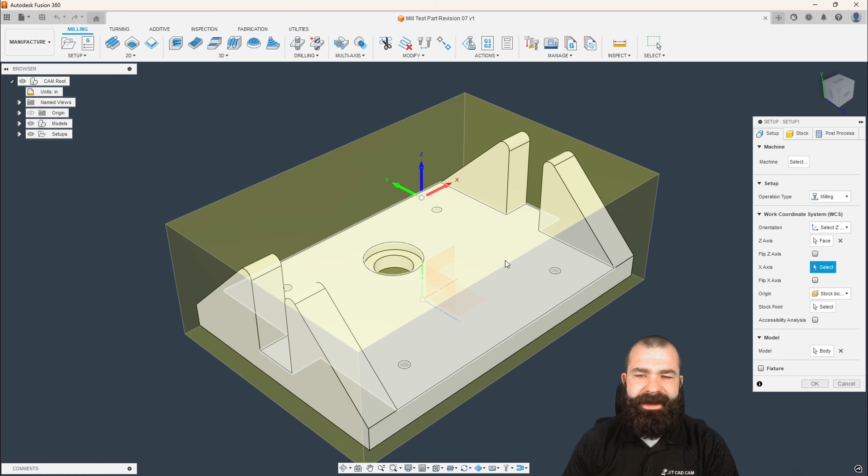Now, the call out for the stock size as a whole is, let's go ahead and see if that's on our drawing. I don't believe it is, but if I remember correctly per the website, it actually is a 3x1x2. Now, as you can see, my Fusion 360 actually automatically gave me that size. However, you can plug that information in here in real time. The trick, though, is always do your setup before your stock.

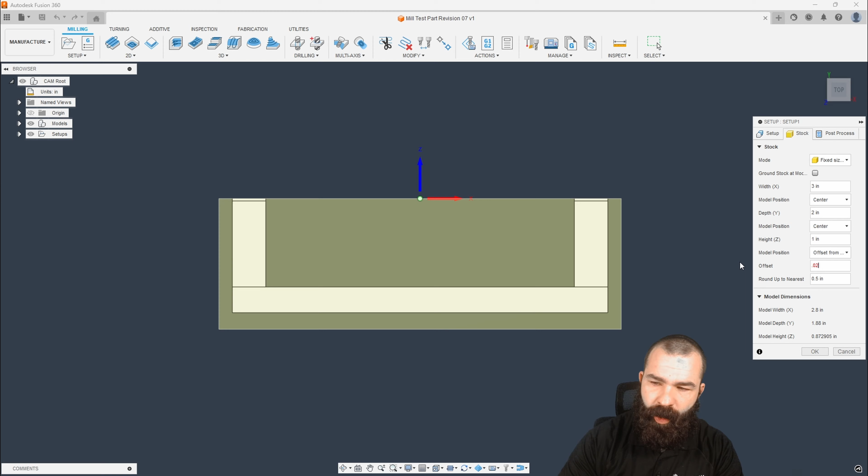And the reason for that is as soon as I pick my Z and set my X in this case, so I'm going to go ahead and create my X the long ways here. Now, if I go back to stock in this case, you're going to notice that the dimensions have automatically changed to accommodate keeping that rectangle around my part. Once you change these actual dimensions, though, it will kind of lock that in, which will throw you off. But again, as you can see, we have our 3, 2, 1.

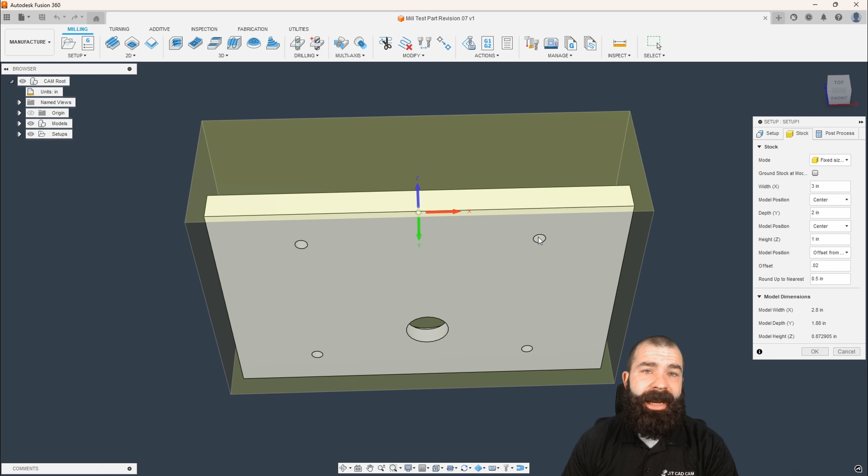The only thing I'm going to adjust is my offset from top. And I'm going to go ahead and just move this up to 20. And as you can see, with that sitting at 20, we now have that ability to face off the top or clean up any material.

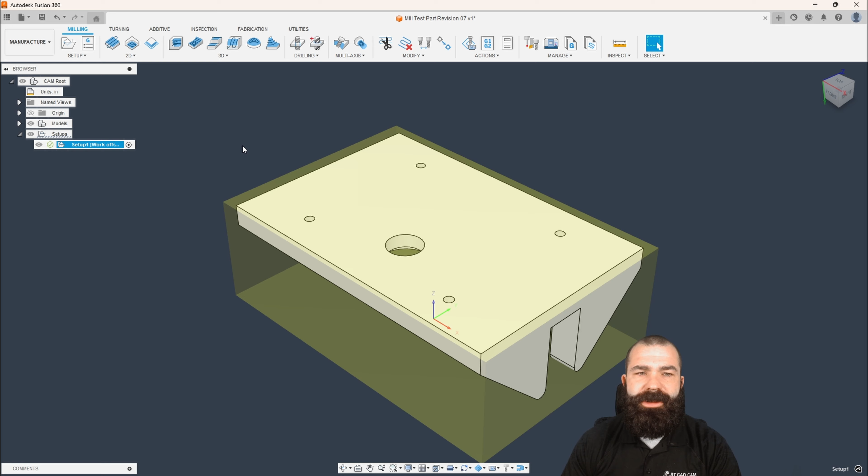However, here is something that I think I might actually do on my part, which is do the backside first so I can hit all of my outside edges, face off the back of my part, maybe tap, if not actually spot drill these holes on the backside, and get that all cleared up for the flip on the next op. So let's go ahead and do that.

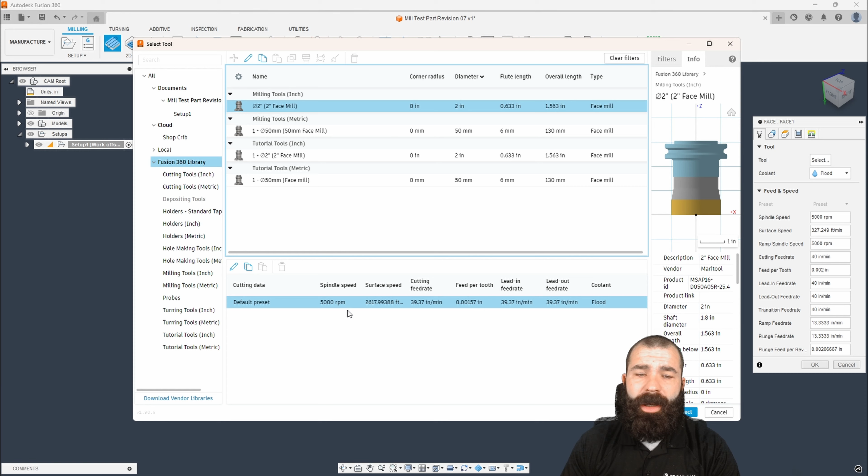So I'm actually going to go back here and flip my Z. Now you can see I actually have my rectangle faced up. Again, that base is very square for me, so it's going to make it very easy to hold it in an op 2 scenario. So let's go ahead and hit OK. What I'm going to do from here is I'm going to go ahead and face off my part. So let's go ahead and go 2D face.

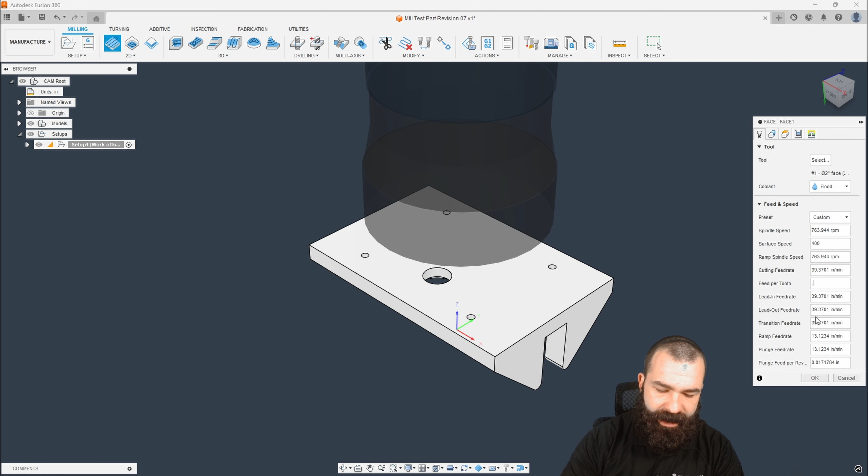I am going to use a lot of default tools here. So as you're going to see, I'm going to jump down to the Fusion library. And then from here, we're going to go to the face mill, and I'm going to use the 2-inch face mill. So normally, you're going to have a lot of different speeds and feeds in here. And this is where you guys are going to want to plug in your own speeds and feeds.

We can click this edit tool. However, given this is a stainless part, maybe I don't run a lot of stainless. It's not a big deal. I can also modify those speeds and feeds over here on the right.

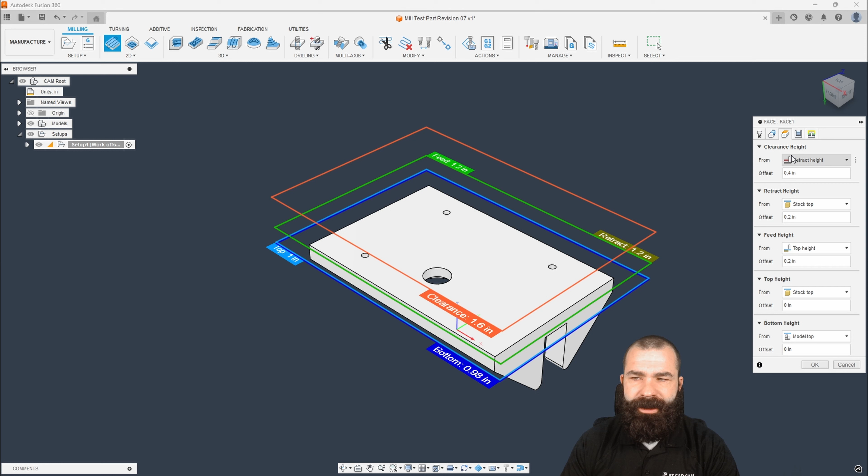So, for example, if you know your surface feet per minute is actually closer to 400, and then your feed rate per tooth is going to be 10 thou, as I plug that in, you're going to notice that everything updates automatically right here. But keep in mind, this is now a custom speed and feed, and it doesn't push back to the Fusion 360 library.

Now, in our XY direction, everything else is going to come through just fine. We have the stock recognized from our setup. We're going to machine down to our model top.

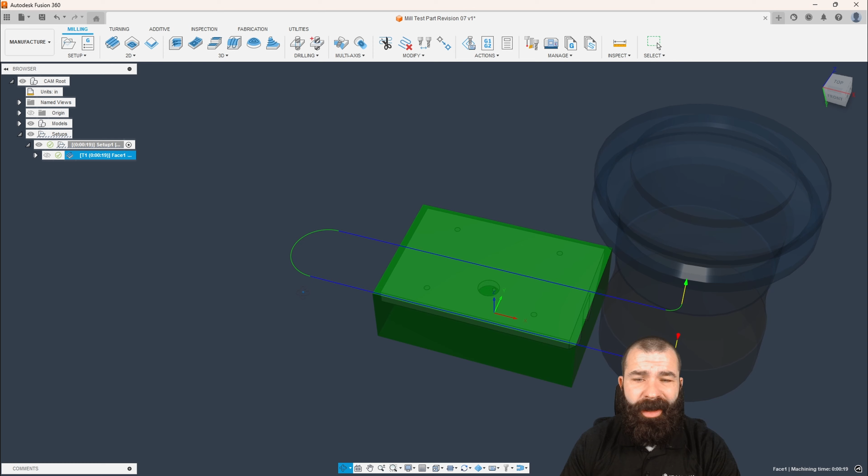Jumping over to our passes tab, as a precaution, I like to turn on multiple depths just in case there was more stock than that 20 that we left there. We're automatically going to find that. So as you're seeing, it is that easy to go in and create your initial cycle, which is going to face off the top of that part.

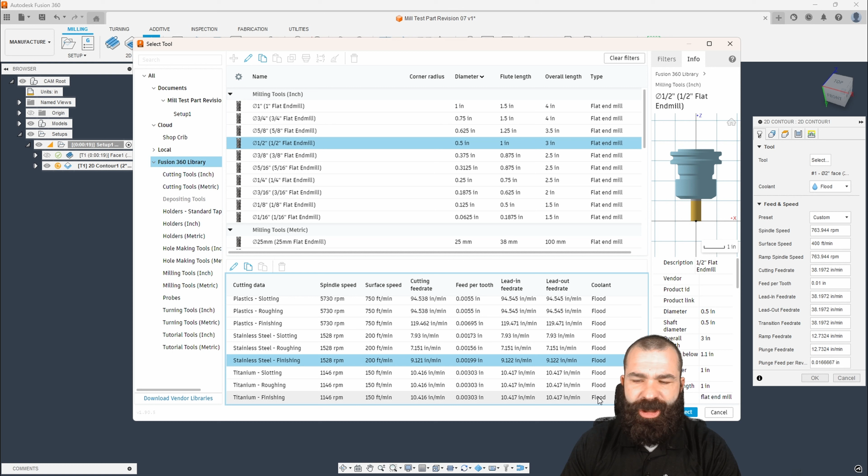Now, I'm going to go ahead and hit F8 on my keyboard. That's going to turn on my in-process stock, and I can now have an idea of going around the outside of this part. Now, for some of you, we could rough the outside of this part. I'm not actually going to rough the outside of this part, in my opinion. I'm just going to go straight for a finished 2D contour.

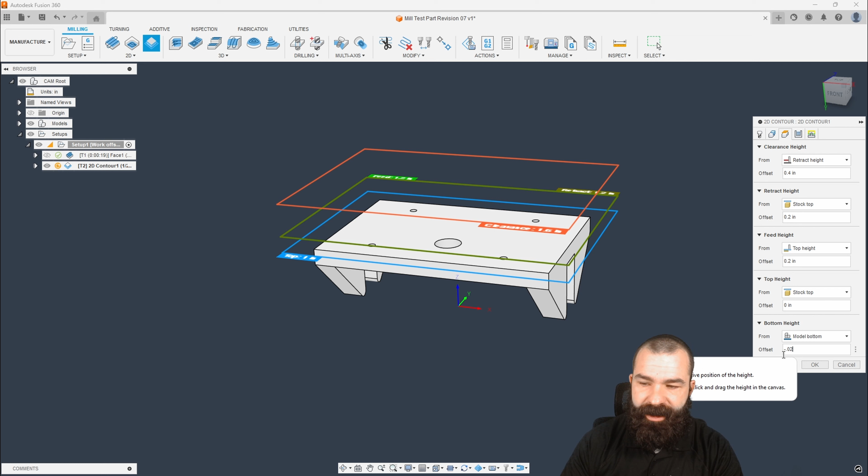We're going to go ahead and switch out my actual tooling. Let's go for a 1/2 inch flat. So again, as we're going to filter by flat end mills, we're going to go for that 1/2 inch flat. And then to show you guys more speeds and feeds here, since this is stainless, we're going to go ahead and go down to stainless finishing. I'm going to select that speed and feed.

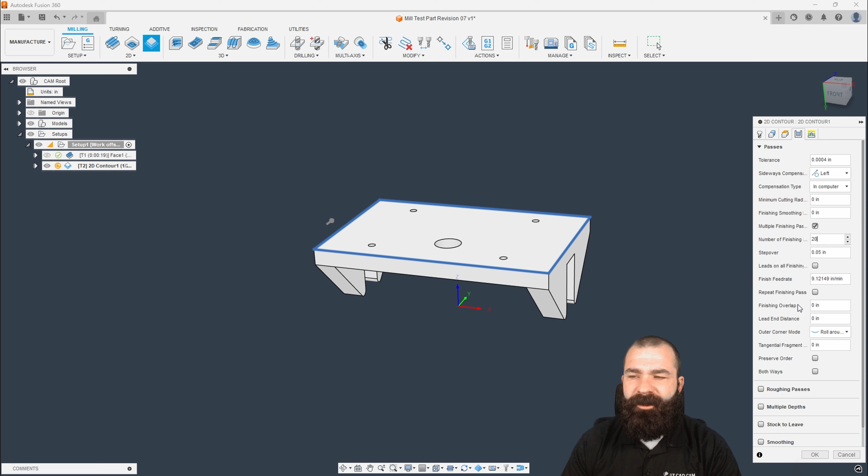And then from here, I'm going to go ahead and give it my actual geometry. So we're going to go ahead and pick that edge. My heights, so my Z-axis, we're actually not going to go to that selected edge. I'm actually going to tell the software I want to go to model bottom. And then I like to go past, probably about 20 thou. So I'm going to say -20. Taking a little further step over here.

Again, we can actually do some roughing passes here inside of 2D contour. However, I may actually want to do this as all finishing passes. And now the cool thing here is if I set this to like 20, first time through, we're going to go ahead and hit OK. And what you're going to notice, it's going to make 20 passes, which is very overkill. However,

again, Fusion is very intelligent with very little information. So if we give it a stock contour and now I hit OK, you're going to notice it's actually going to reduce that down to just knocking off the corners and then making 2 passes, even though we told it 20. So again, you could do a rough and then a finish.

I think personally, since it's one part, you may actually make 2 of these in case you mess one up. It happens to the best of us. But I'm going to go ahead and just do a finishing toolpath and cut down on all this extra programming to really not save any time in the long run for this specific part.

So now from here, let's go ahead and let's do our spot drilling. So I'm going to go into the drill profile. We're going to go ahead and select our spot drill. I do have in my shop crib a lovely little 3/8 here. Again, we could go down to our stainless speeds and feeds, or depending on what your speeds and feeds are set to. Again, we need to give it some geometry, so I'm going to go ahead and select a hole face here.

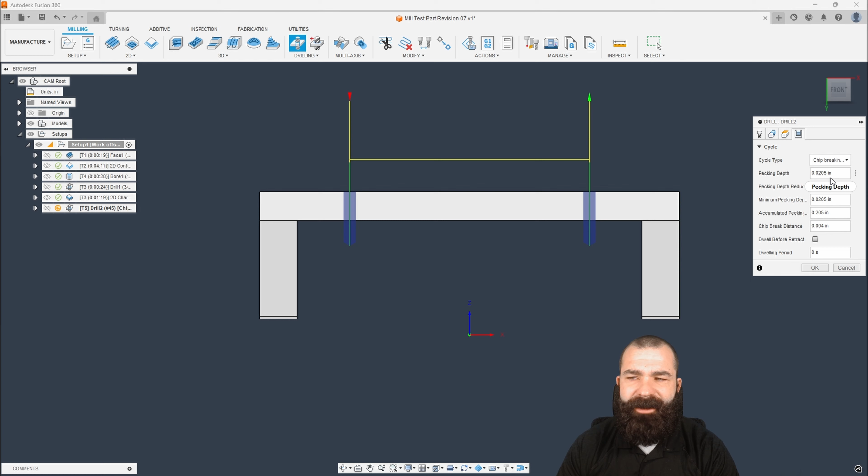And then here's where the tricky part is. Remember, we're doing the backside here first, so all this material underneath hasn't been cleared out. So we do have to be cautious that we need to drill deep enough that we have enough room for our tap to also go all the way through and clear. So we are still going hole bottom because that gets us to the bottom of that plate and that surface. Now I want to go drill tip through, and now I am going to break through a decent amount. The reason for that is, depending on your tap, if you have a bottoming tap or a starting tap, we need to make sure that we have adequate room to go all the way down.

Now, looking at this drilling cycle, we are getting into the world of possibly being closer to 5 times deep. I'm going to go ahead and switch to a chip breaking cycle. What a chip breaking cycle is going to do is basically give me pecks. And it's going to get to a certain point where it's too deep, and it's going to do a full retract and clear itself out. So a big difference: deep drilling retracts every time. Chip breaking will only retract at a maximum depth set, and then it will peck in between those cycles.

So now that we've drilled that, let's go back. We're going to now do drill again, and we're going to grab our 4-40 tap. So back to my Fusion library, we're going to grab a tap, right-handed. Scroll down here a little bit, and there is our 4-40. Again, your speeds and feeds as always, guys. Same concept. We're going to pick one hole. We're going to say select same size diameter. We're grabbing all of those.

Of course, we want to go through the bottom, so I'm going to check drill tip through bottom, and then I'm going to give it my breakthrough amount. Let's say in my case, it's now 100 for this. So a really nifty trick here: because everything is updating in real time, I can see how far my tap goes through, and I can also see that it's not actually bottoming out on my drilled hole, which can be very beneficial depending on who is operating that machine, or if this is your first time programming. This is something that will cause broken taps all day, every day.

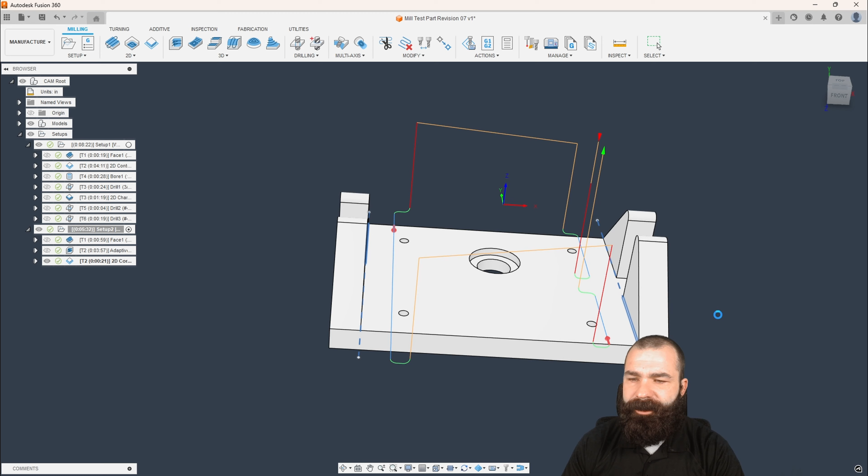One other thing that you noticed is we actually didn't finish our floors up yet, which we may want to do, which is causing that actual ugly step down in our part because we failed to actually clean up the floor on this part. So let's go ahead and fix this real quick, and let's do a floor cleaning cycle.

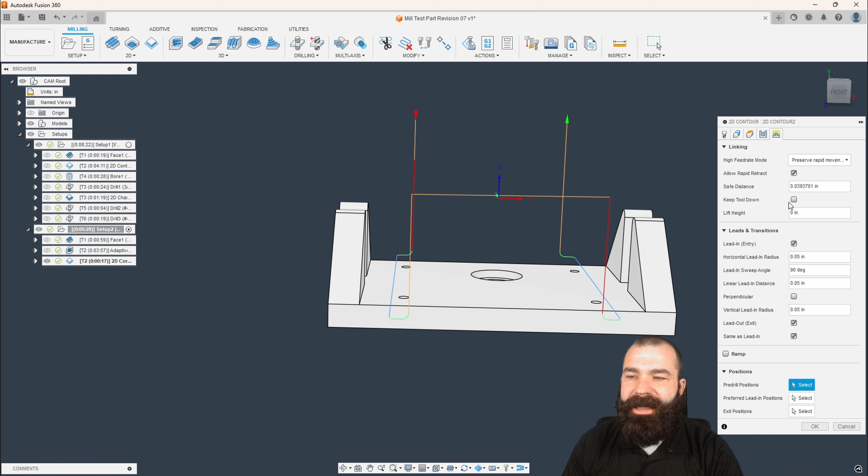So I'm going to go back to my geometry tab. We're going to go ahead and close that. I'm going to edit this guy here. Again, we're starting 250 off, and we're going 1.5 past. And again, as soon as I hit OK, you guys are going to see how we are now coming all the way across that with one clean motion. Now, I don't like this retract in here, so let's fix that real quick.

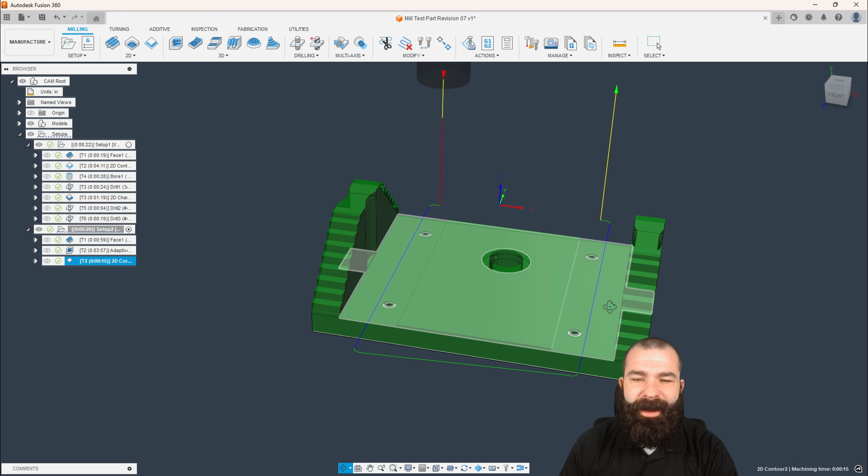So again, if I go to my linking tab, and a little pro tip here for you guys, if you notice the colors, yellow and green are kind of your lead in and lead out motions. So it's always going to be something you're going to adjust in your linking tab. So again, this is orange, red, everything but your blue lines, basically. So I can come in here and I can say, keep that tool down. And now I really don't need to do a vertical lead-in radius at all. So I'm going to go ahead and zero that out.

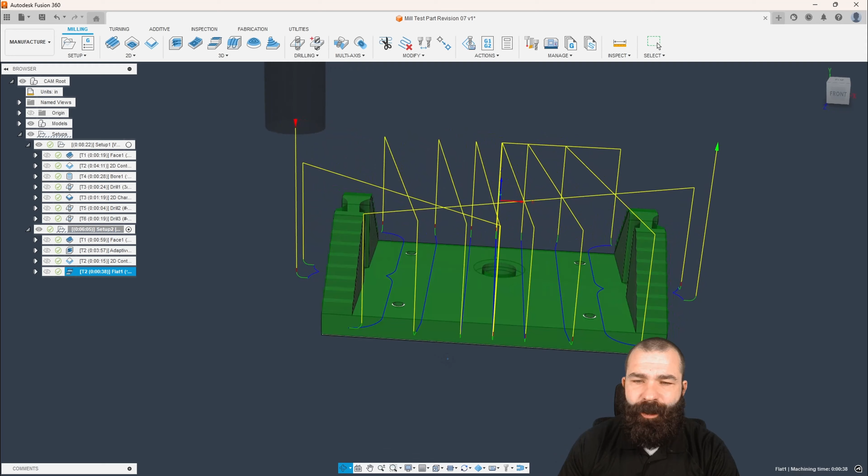And what you're going to notice now is we come straight to depth, we lead in, we go straight across, we lead in, and then we lead out. No vertical lead-ins, no funky moves. But like I said, there's a lot of ways for you guys to achieve what you're doing here. I'm just programming this off to just make it as simple as possible for you guys to get a good fresh start and learn some things in Fusion.

So let's do that floor cycle. So I have a lot of different cycles here we could do. We could do everything from flat. And again, an easy way if you guys are experimenting with new toolpaths and you don't know what you're doing, is to grab a toolpath and hit OK and see what it gives you.

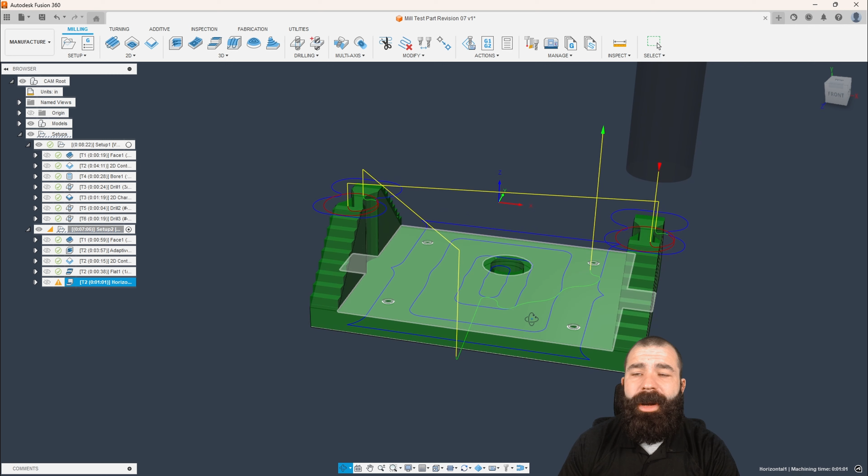So as you're seeing here, flat actually works very good. However, it is going full width across my part, so I have to be conscious about that. And we're also doing a little dipping in and out here on the outside.

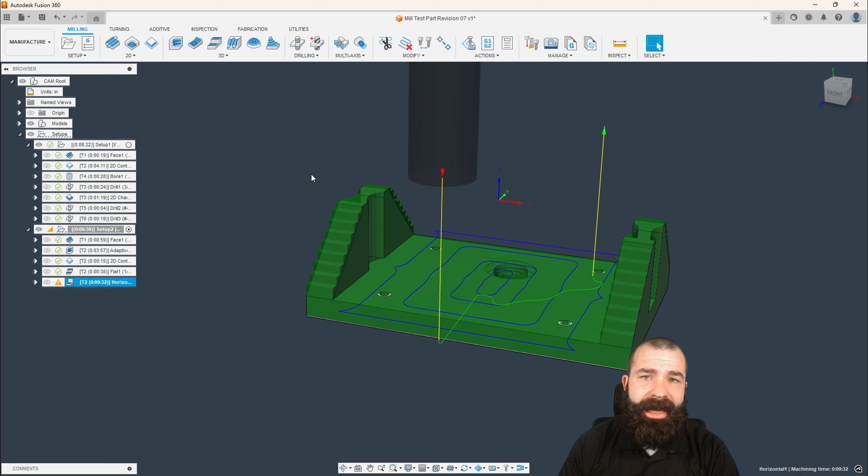Now, we could also do what's called a horizontal toolpath. So let's go ahead and grab that horizontal toolpath. Again, hitting OK. Don't mind this stuff up at the top, it's not a big deal. But as you're seeing, again, we're staying on our part on the inside. We're coming in over here, coming straight in, doing our center section, and then working our way out. Now, whatever way you want to choose, that's up to you.

But one thing I am going to want to do is make sure that I don't really need to start all the way at the stock top. I may actually say start at the top face here, and maybe I bring that up just a hair, or I leave it right where it is. But as you're going to see, I've now eliminated that upper section because I'm filtering in Z now.

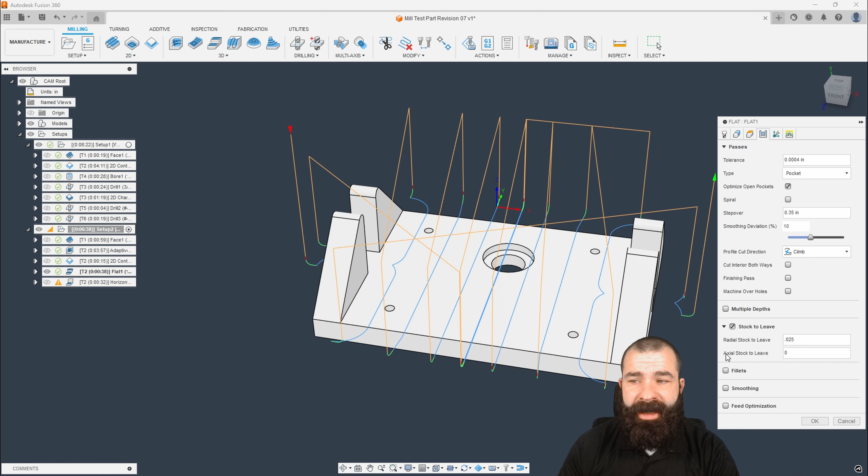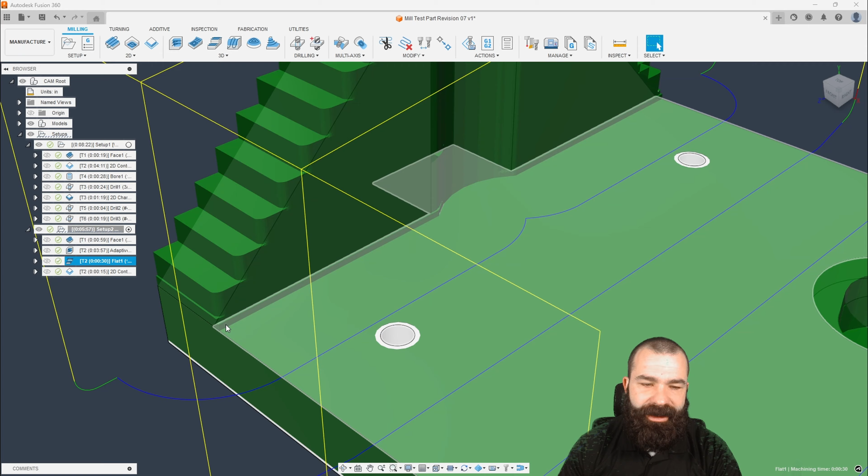Again, we go back to that flat toolpath. I can make some changes here to avoid outside areas. I don't personally think one is right or wrong, and this is up to you which one you choose. But you always want to make sure you leave stock on the walls when making these passes, and you always want to leave more stock on the walls than when you're doing your finishing pass for the walls, because we don't want to rub that wall and cause any surface defects. So I'm leaving radial stock, and nothing on the axial.

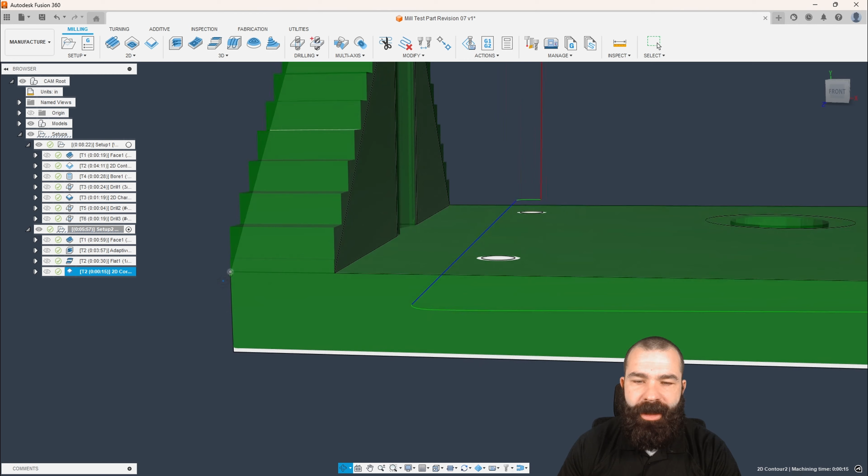So what's happening is we're allowing that toolpath to come in, and I'm going to reorder this real quick so you guys can see this. I'm going to stick with the flat toolpath, so let me delete my horizontal. But if we look at the stock recognition here, you're going to notice that there's this lovely little step happening in here. The purpose of that step is that we've roughed everything down to this point. We left 25 on the walls, right?

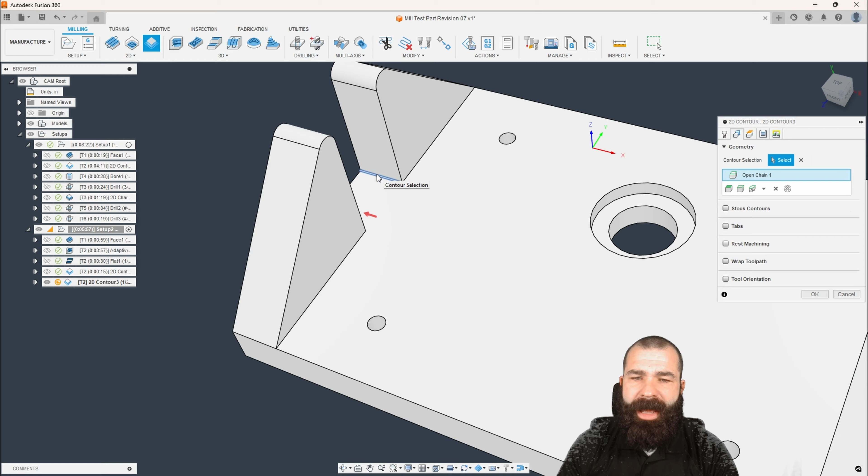And here's my model in here for you guys to see. Now, I'm leaving 25 here to guarantee when we do the floor that I don't touch the walls. And then we come through and clean up those walls, as you can see here, and knock that all down to a finished surface. So this is working out really well. We're sticking with a very large tool so that we don't have any issues.

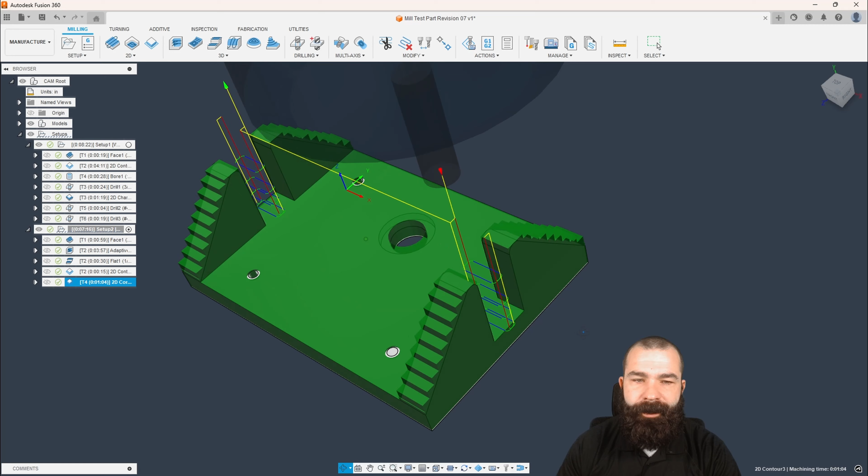So now let's actually split these pyramids in half. Again, I'm going to go for a 2D contour as a little bit more of an experienced user. I'm going to hold my Alt key and pick my two edges. Again, I'm going to go over here, hold my Alt key, and pick my two edges. What I'm going to do a little differently is after I select my 1/4 inch flat, don't forget to set your speeds and feeds, guys, I'm going to go to my passes tab and make multiple depths. Let's say I'm going to go .250 deep because it's 1 times diameter depth of cut.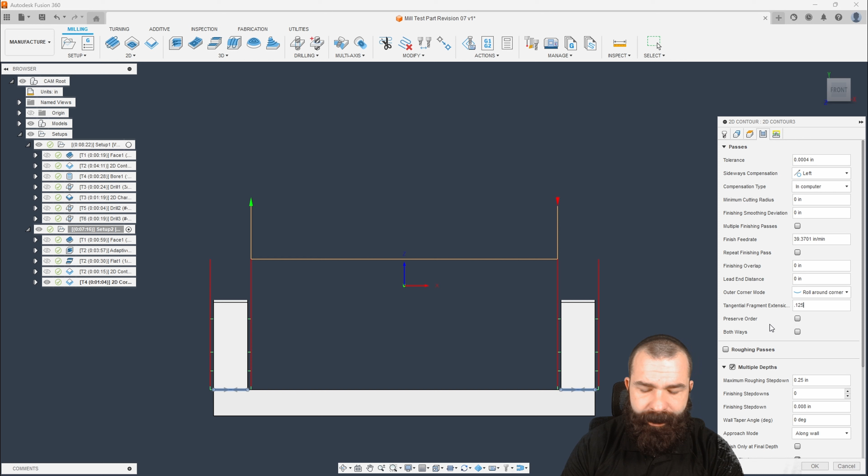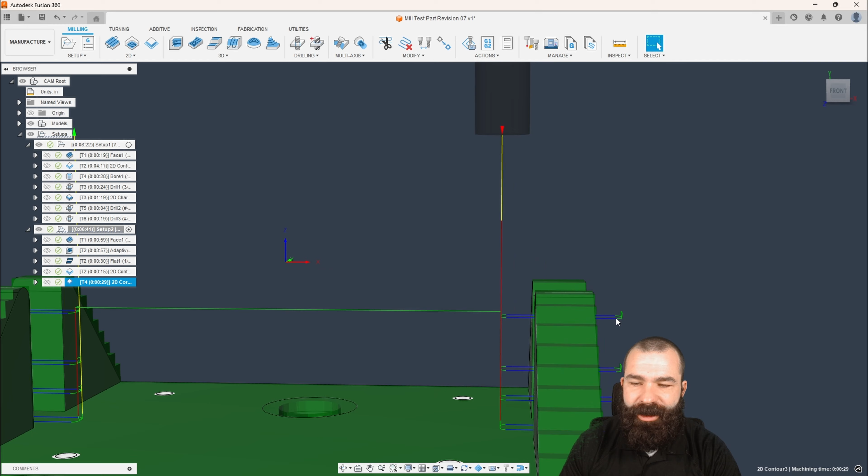So what you're going to notice now is we're splitting apart that area. However, just like before, we want to do a tangential extension to make sure we're starting off that area and feeding into it, not plunging down on it. When we go into 2D contour, in the passes tab, we actually have the ability to do a tangential extension to everything. So instead of individualizing it in the chaining tab, we're going to do it all right here.

So I'm going to throw a 0.125, half the diameter of my tool, in here real quick. We're going to hit OK. And now you're seeing we're coming down and across each and every time. We are doing full retract still.

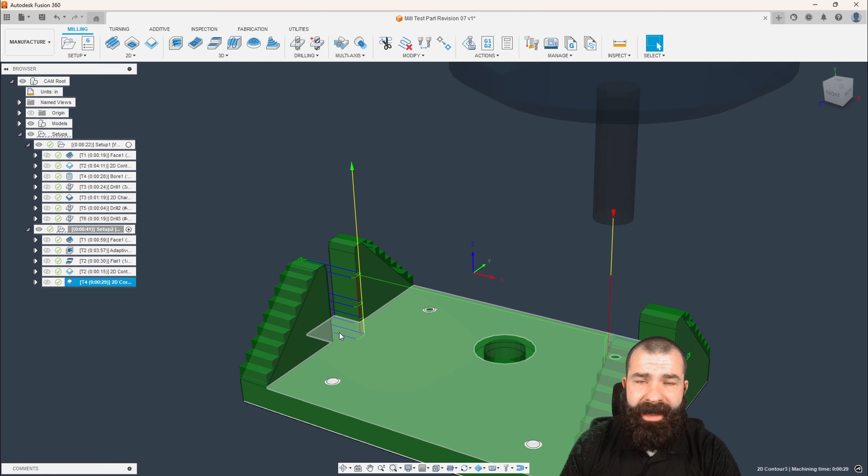And if you guys remember, we did do this before where we went in. We said, no, keep the tool down. There's no reason to retract. And now you can see we're just coming in and out. We still do have that little bit of a vertical lead in, but you guys could zero that out as well to speed up that cycle time as much as possible.

So you could also do multiple passes here, guys. There's a lot of ways to clean that up, but as you're seeing, I'm actually just scraping out everything in there and cleaning that all up just to open it up as per the drawing and the model shows.

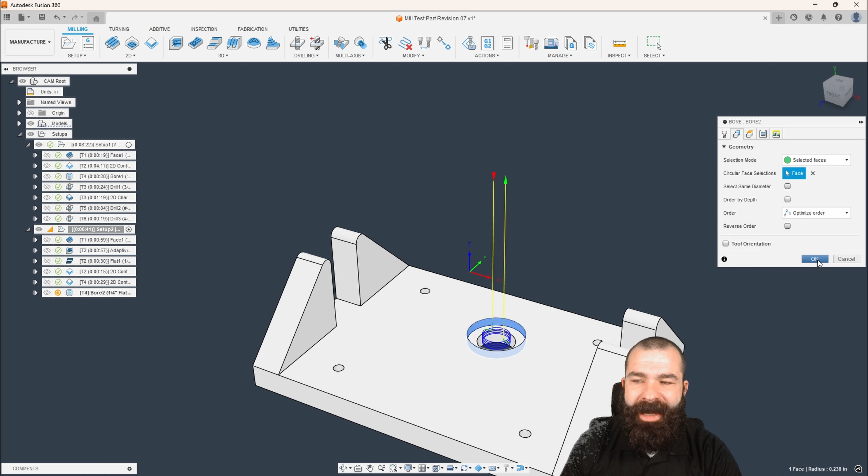So let's attack our bore now. So again, I'm going to go in, I'm going to say 2D bore. Now it's up to you if you go bore here, guys, or if you just go straight 2D contour, because the center is open on this. So you don't necessarily need to bore down.

This is just muscle memory, and what I know has worked out very well for me over the years is I can just say, go in, bore that profile with that 1/4 inch tool, and I'm going to get what I want, and it's going to work out great. Again, you could come in on center, swing around. Also, this is just what I like to do.

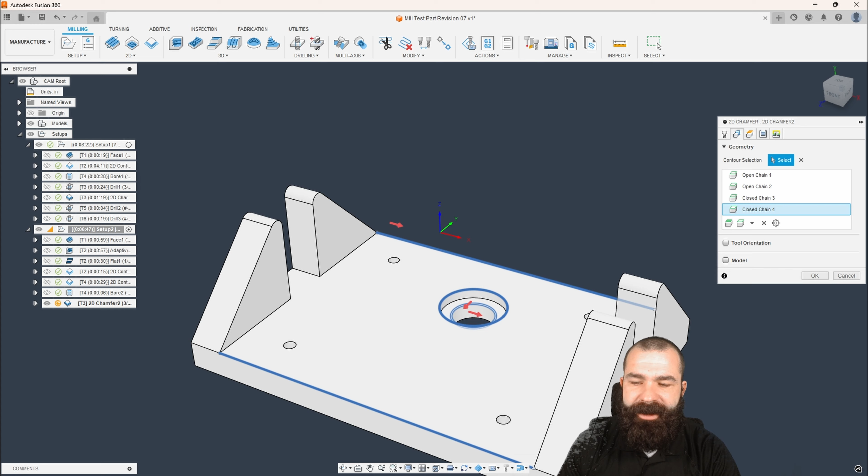So let's go back now, and since we have our drilled and tapped holes, we've actually bored this out. We could go in and actually deburr some of these edges or chamfer these edges again. So let's get our 2D chamfer tool going. Again, I'm going to pick the edges that I want to chamfer. Again, I'm going to set my chamfer width. Let's go ahead and say this is 10, not 100. That'd be a little overkill.

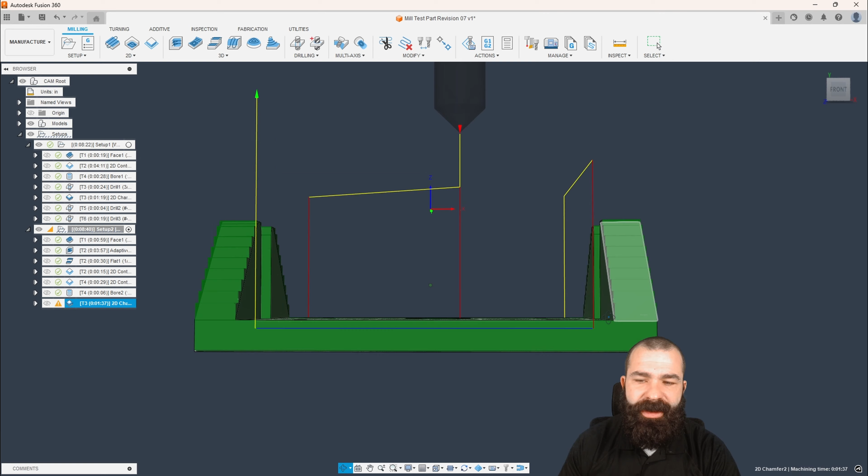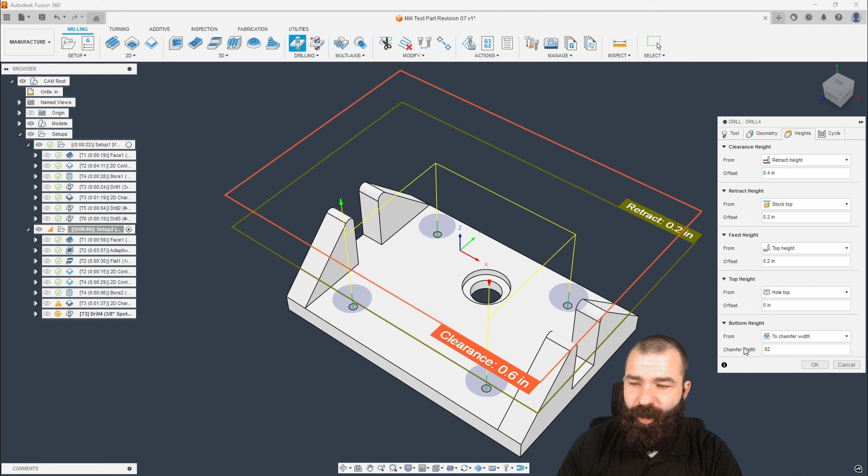I'm also actually going to grab a couple of these edges in here too and see if we can get all of this stuff done in one shot, or if I can't. So one thing you're going to notice is Fusion is going to avoid areas. I am going to get a warning here, and that warning is telling me that certain modeled areas our tool could not actually clear to get in there. So keep in mind, this is the cool thing about that chamfer clearance: we are staying away from these corners so that we actually don't cause any problems there.

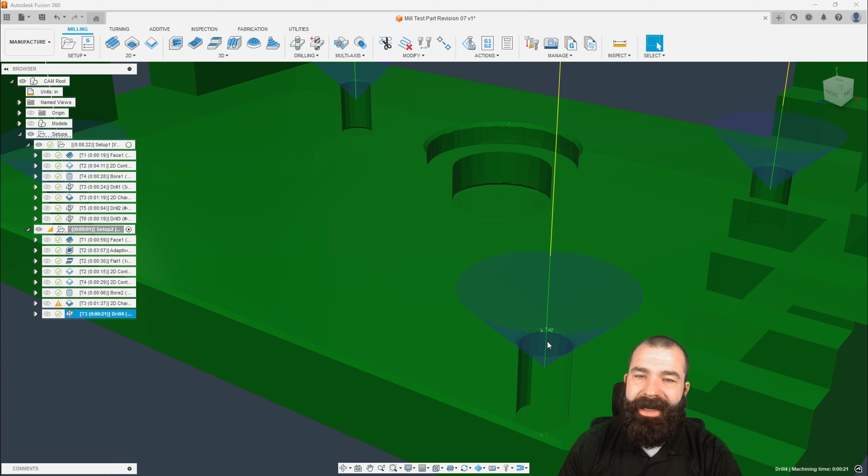So again, we do that drilling. We're going to go ahead and pick our faces that we want to drill. Again, there was a little bit of that bug there. As you guys saw, I had to zoom in for it to give me that face, but it's not a big deal. Again, we're not going to drill tip through bottom. We're just going to say 2 chamfer width. If I remember correctly, I think we threw 20 at it last time. And just like that, we're now spot drilling all those backsides and deburring those edges.

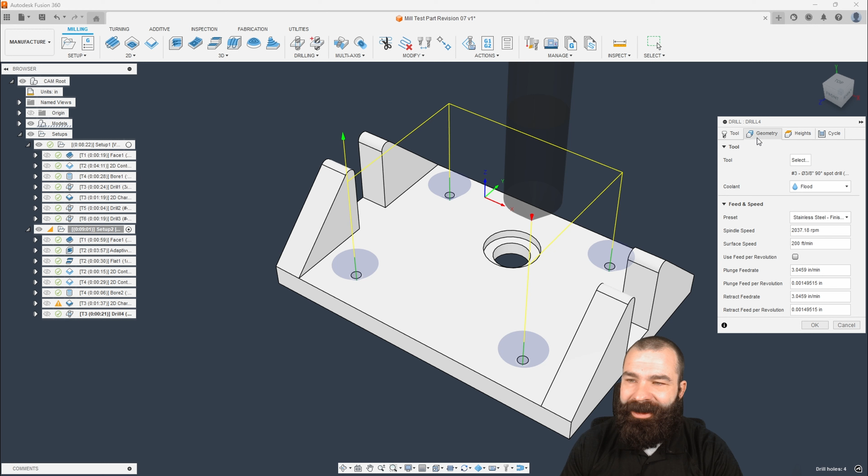Again, this is the cool thing with Fusion's physical representation of what you're doing: if I turn my model off, you could actually see that diameter right now is the maximum size of my tool. And then you can see we have a little bit more there. So I got really lucky with estimating and guessing what's capable.

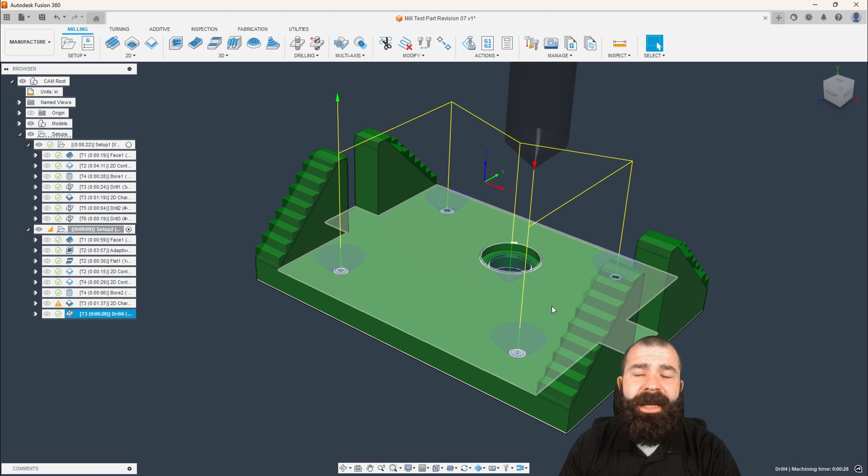One other thing that I am noticing, though, is we're not actually chamfering the inside of this hole. Now, the reason why we're not chamfering in here is because our tip offset isn't great enough to get down in here, or it's too great where the shoulder of that tool is hitting our chamfer up here. Again, these are things to keep in mind depending on what you're doing or how you're doing it. I could, as always, come back in here, add this into when we do our spot drilling, and just like that, I'm now hitting that lower profile again and busting that edge.

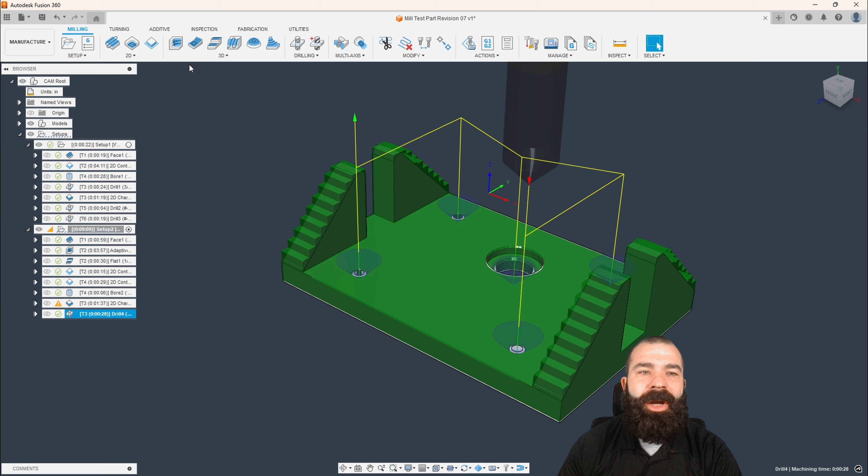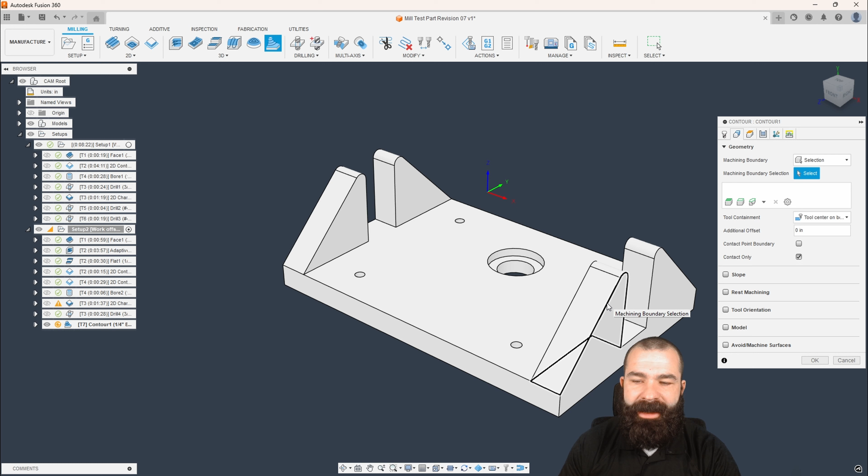There's a lot of lenience on both sides that's going to work better for you. If I ran 100 of these, by all means, I would hope I have a 4th axis or a 5 axis, allowing me to tilt it and just machine it. But since we're working in a 3-axis machine, we're just going to go back and say, let's do a 3D contour. Let's swap out for a 1/4 inch ball.

So we're going to go ahead and go to our ball end mill. We're going to grab that 1/4 inch ball. Again, as you guys know, grab your speeds and feeds. We're going to jump over to our geometry, and we're actually going to select what we want to machine. So what I want to machine is this area around that fillet and everything.

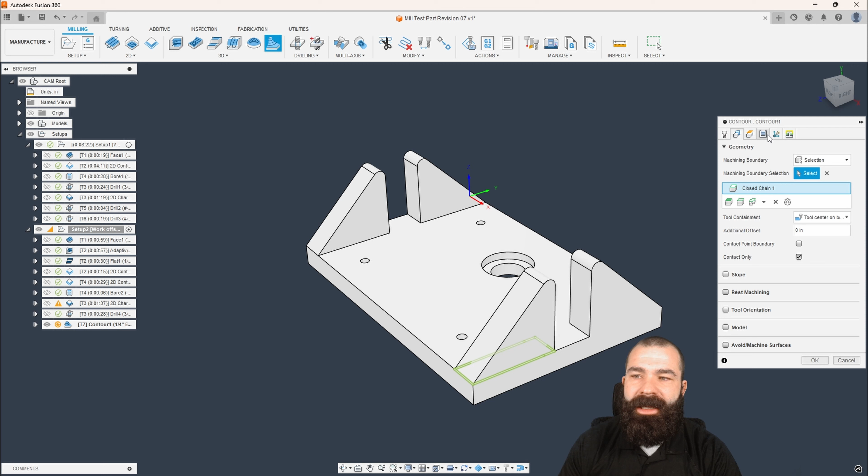But what you're noticing is depending on where I put my mouse, I'm getting kind of a weird chain. Even holding the Alt key and selecting is a little tricky here because, as you're seeing, it gave me the edges, but it gave me everything down and around in a funky fashion. For example purposes, I just click this chain again, and I am going to bring it all the way up and around to kind of show you what I want to do, and that's why I've selected it. But when I still hit OK, it snaps down to the bottom. It's not a big deal, guys.

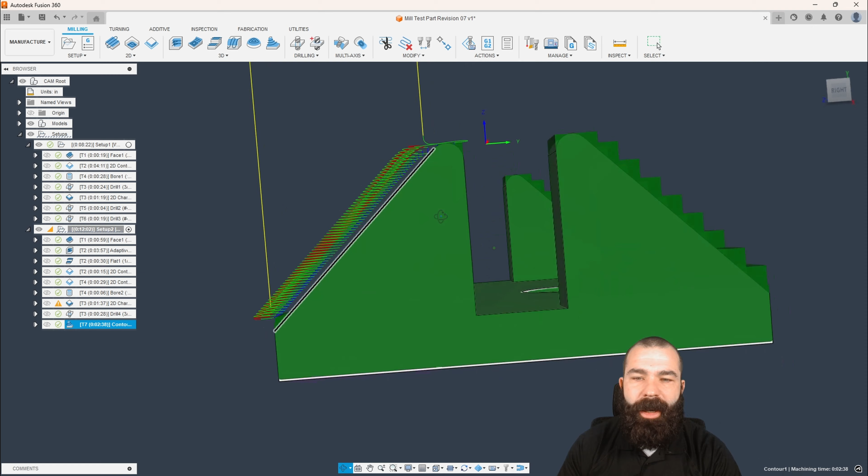So again, I'm going to do one of these to test it, and then I'm going to add the other 3 in as needed. So again, we're going to go over to our passes tab, I'm going to give this a much smaller step down of about 10 thou. Again, we're going to make sure that we have everything set. We're going to hit OK and see what we get here.

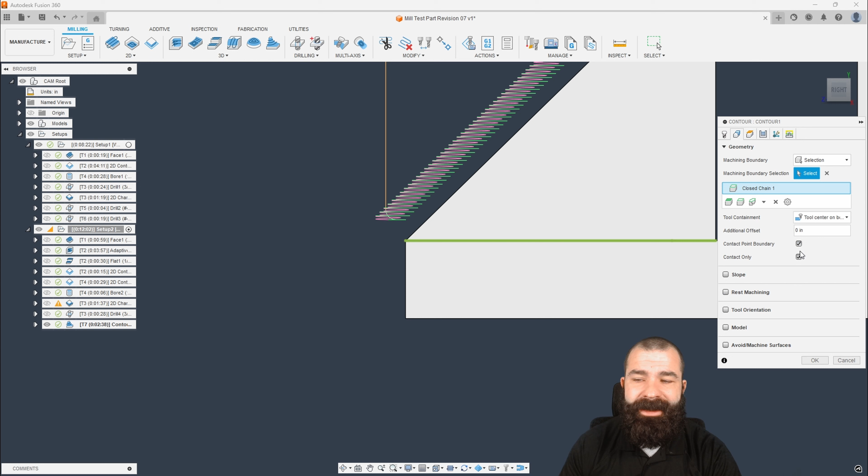So as you see, we're actually coming all the way up the top, and we are starting to see that that 3D is working, but we are having a dilemma. And that dilemma is we're not getting this upper corner, and for some reason, we're not getting this lower corner, right? And the reason why that is happening is because if we go back to our containment, we have told it to keep the center tool of that containment. So if we actually square up to this, you're going to notice that the very tip of the tool actually sits here, which is vertical right over the containment.

Now, what I want to do is I want that tool tip to actually go past this and come down over here where the actual edge of the tool is touching. And how I do so is by turning on what's called contact point boundary. Contact point boundary is exactly that. It shifts from center line to center of where that radius is engaging with my part.

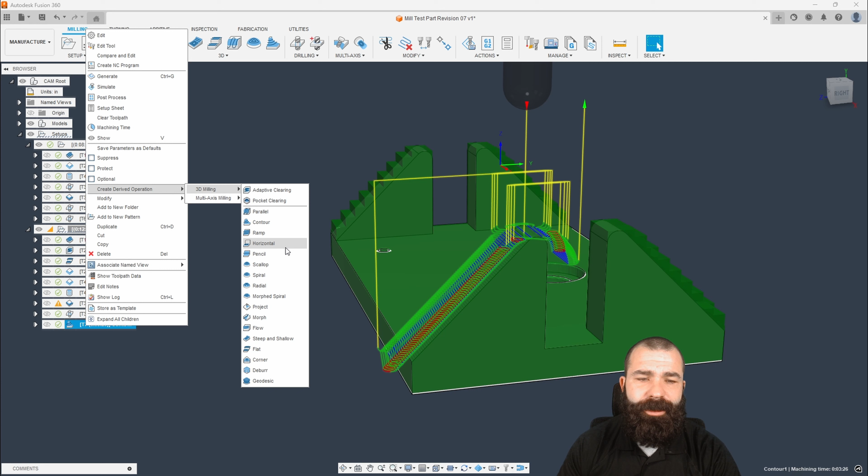So if I go ahead and hit OK again, what we're going to see now is we're actually coming all the way over the top, and we're coming all the way down this face here. So again, if we look at this in a couple of different views, you're going to notice that we're 3Ding that all the way up and over. Now, there are a lot of ways for you guys to do this specific profile. You could have also done this with a parallel, right? We could have used a parallel toolpath to go up and over.

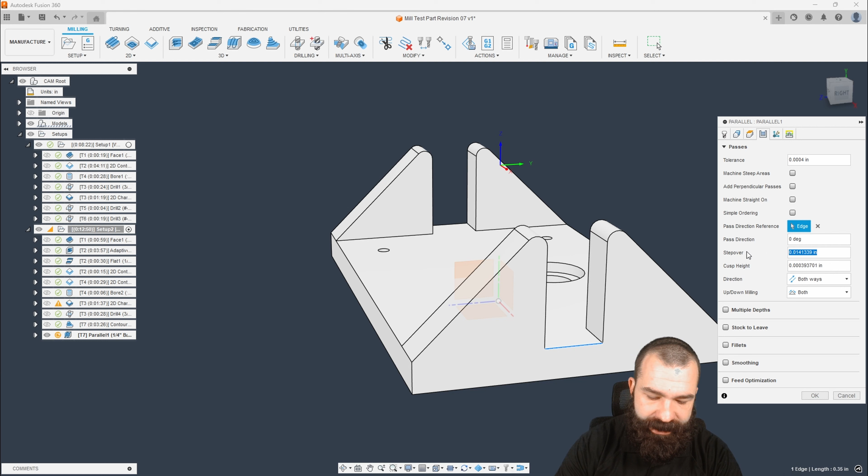A neat trick, when you guys are experimenting with this stuff, if I right-click the path that I have and I go through, I can actually do what's called a derive. And what a derive allows me to do is to bring that information, like contact point boundary, boundary selected, all that stuff through in real time. Now, with this actual parallel toolpath, we can define a direction. So I'm going to use this little edge here. And then again, let's just give it 10 thou step overs.

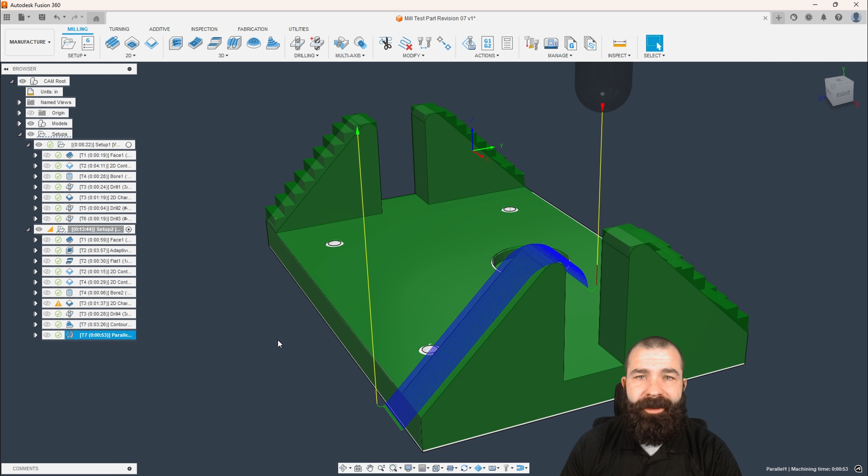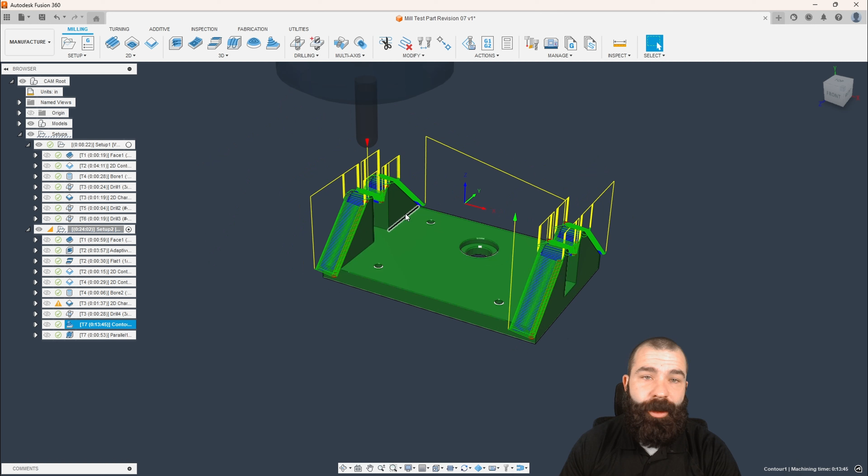And what you're going to notice with the parallel path, we're now running up and down across that profile. Again, this could give you a dramatically better finish. So there's nothing wrong with doing maybe a pre-finish with this path into a post-finish with this path. But as you can see, neither one is necessarily right or wrong. We're more concerned about surface finish and accuracy, and both of these paths are going to get you there. So let's go back, and I'm just going to take my 3D contour. We're going to add in those couple of extra profiles.

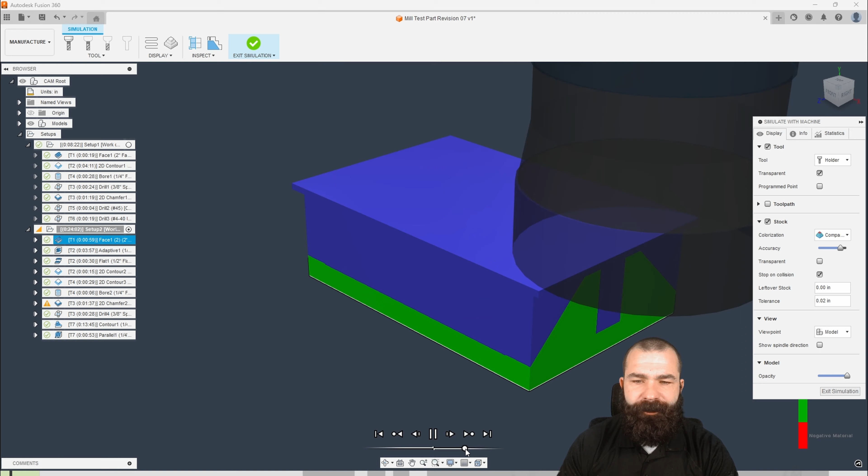Again, what you guys are seeing me do here is I'm picking one edge, and it's actually giving me the full corner as we wanted. We could go ahead and hit OK, and just like that, we are now 3Ding those slopes. Now, if I needed a better surface finish or worse surface finish, I can adjust my step down, everything and anything here. You could also use a bull end mill, which is a corner radius flat. I just picked a ball, very simple to do.

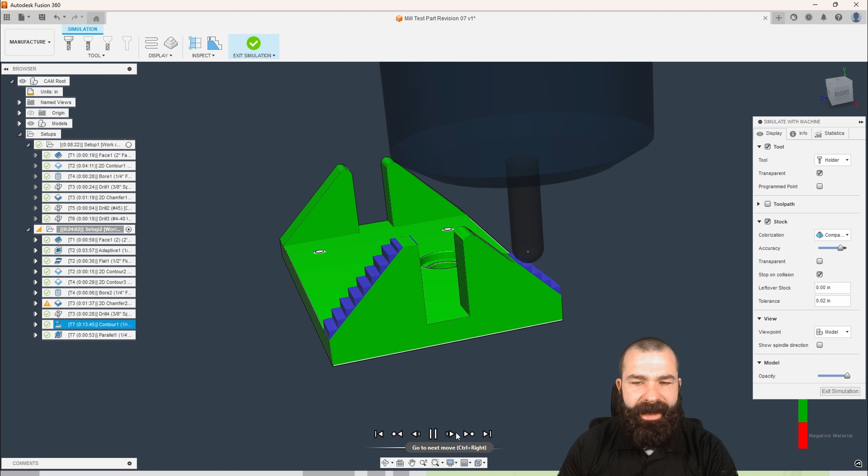So now that we've done that, let's simulate this guy out real quick and take a look at it. So we're going to go ahead and hit simulate. I know we didn't simulate the first half. You guys can simulate that obviously before you run it. We're seeing in real time how our tools are going to act, what's going to happen as we go through and machine this. And this is very, very beneficial for you guys to make sure that you're not having any collisions or any problems with your machining.

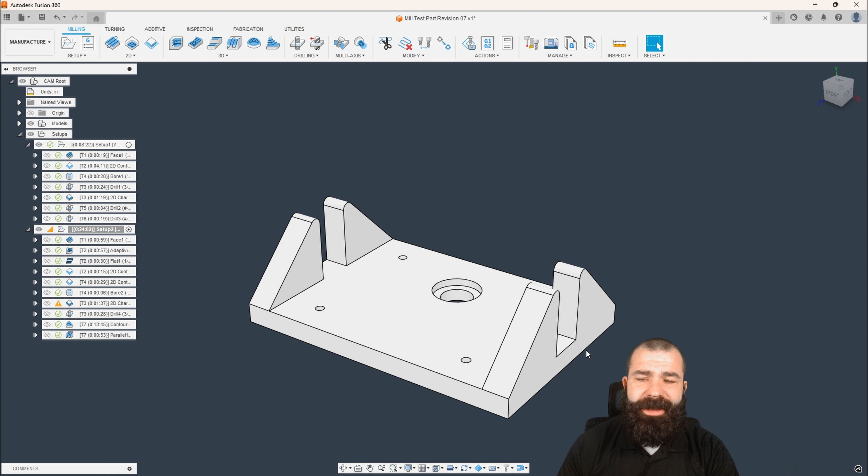And from there, we're not hitting any holders. If I had my vise and everything else in here, that vise would show up, of course. Make sure we're not hitting the vise. And that might be one thing you got to be a little cautious about, which way you hold this part. But overall, this actually looks exceptionally well.

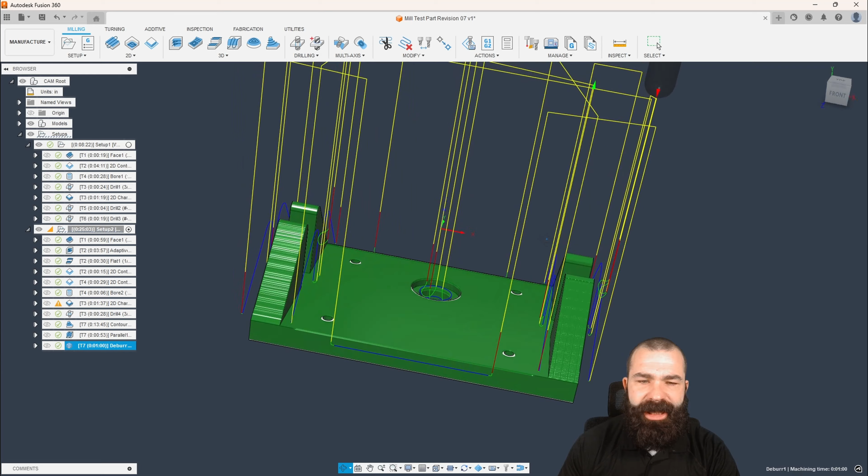And before I actually wrap up this video, I'm going to do one more toolpath. And now this is a machining extension toolpath. However, what you're going to notice is it does give me the ability to 3D deburr and break edges. And that's what I absolutely love about the deburr toolpath. I actually did a Fusion Friday video on it last Friday, and you guys are welcome to go check that out.

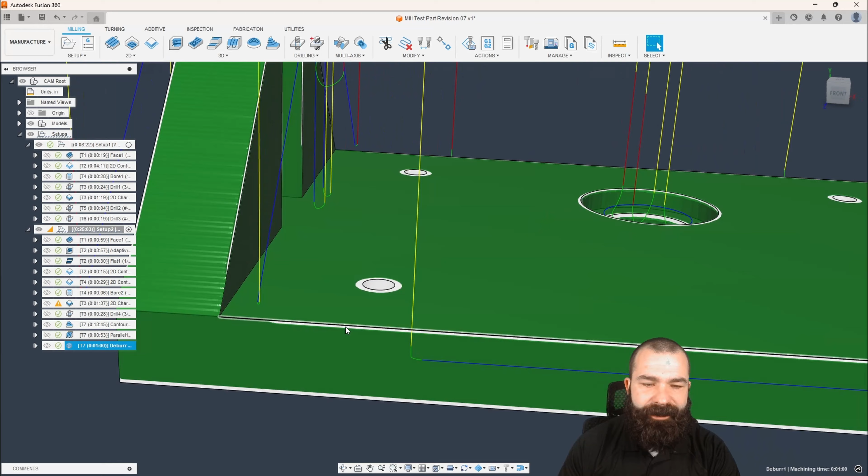But as you're going to see, if I grab that tool, and I'm going to go ahead and say 10 thou edge break everywhere, right? And I hit OK, it's actually going to go up, down, and around all of these edges anywhere and everywhere where it can engage. Now, another thing this can do is we can make a couple of quick modifications. So again, I'm going to go to my passes tab, and I'm going to say cut with tip of tool. And what that's going to allow us to do is get even closer into these corners and try to get everything deburred as much as possible.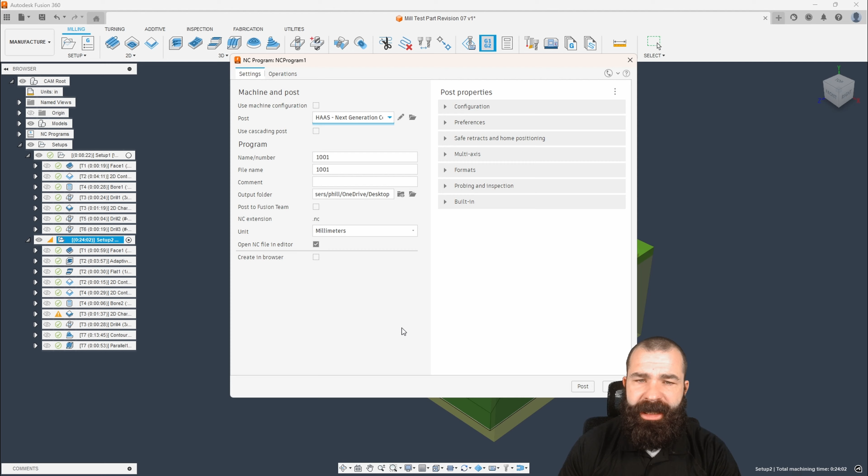Again, breaking these edges for anybody that's going to handle this part or having to turn this over to Xometry, of course. It even gets our vertical edges. So if you want to see more content on that actual deburr toolpath, check out my Fusion Friday video where we dive a little deeper. I'm going to go ahead and remove it.

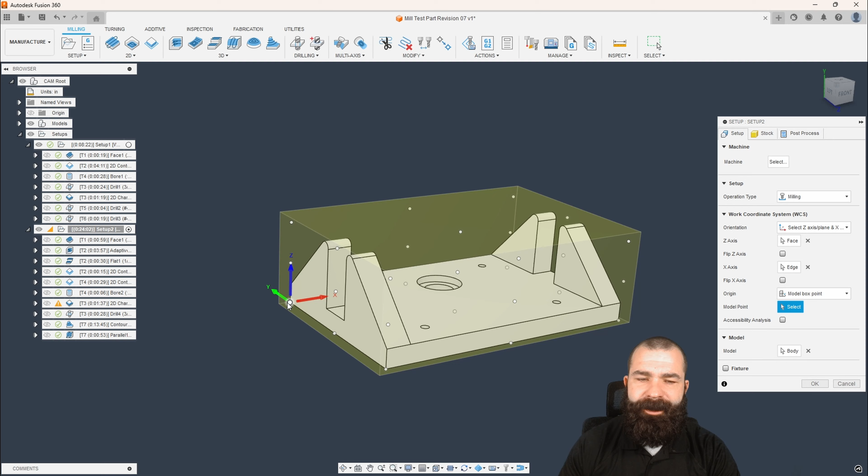So at this point, if you are new to Fusion, we would go ahead and post-process this out. I'm going to post-process the whole setup. We're going to go ahead and right-click Post. We are going to have to pick our post-processor. So depending on your machine, we're going to go ahead and grab our post. We're going to hit Post, and then you're going to have your G-code to go run.

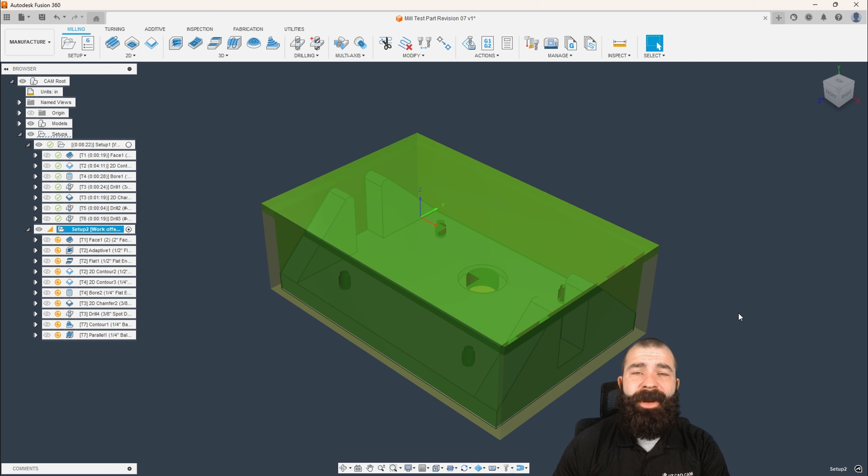Now, another little tip here, guys, is if you don't like where your work offset is, again, you can move that at any time. Maybe on Op 2, I want to use the model box point. And what I'm going to do is use bottom back left corner. And the reason why I'm going to do that is because that's my fixed jaw. My stop is over here on the left, so we can align that and hold on to it. But again, this is just little things in your workflow to make your life much easier.